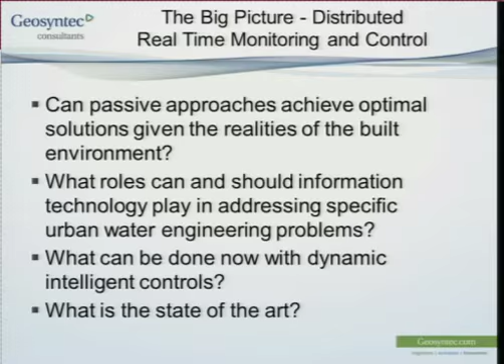You all know the challenges that we have, especially in retrofit situations. Can we fundamentally rebuild our cities, or do we have other ways of fundamentally using the existing infrastructure in new and interesting ways? And then one level down, when you say, okay, maybe we should look at things besides just passive solutions, what roles can technology play in providing an alternative to that? And then understanding, hopefully from this presentation, where we are with the state of the practice and the state of technology.

So I didn't just decide one day that this sounded like a really cool thing to go out and research and work on. It's like most things that look really interesting. They take a long time to develop. The very first opportunity in my career to look at this was a research study funded through CICEET. And the goal of the project was really fundamentally to take information from the internet and get it out to control real things in the cheapest, most efficient way possible. And this was specific to salt marsh restoration.

And that's a whole other presentation on its own. It was a really great project, but we got $250,000 basically to find the lowest cost, most efficient way of taking information and using it out in the environment. And at that time, this project wrapped up around 2007. How many of you had smartphones in 2007? Okay, none of us. How many of you have them now, right? Fundamental change to the way we actually operate with information.

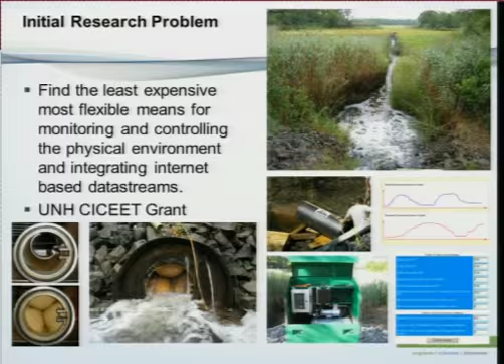This research, right as it was wrapping up, we were able to look at and see that there were fundamental new ways to do what we had done. We had used conventional industrial automation and SCADA equipment to do that work, and we realized things were really changing very quickly. So we learned a whole lot about that, and as a water resources engineer, I saw that there were lots of opportunities to do different things.

So I'm going to mention this term, Scott mentioned OptiRTC. That's kind of our commercial name for what we're doing. But the underlying research is really highly distributed real-time control. And what is it really? It's an ecosystem of smart environmental infrastructure. And the key thing you'll see in the architecture that we have is that it's completely scalable.

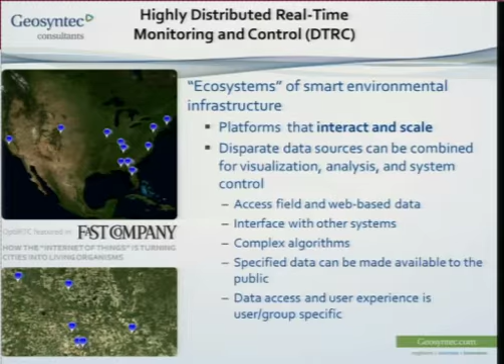So you're not limited by the physical constraints between where sensors are, where actuators are, and the way in which you use them. And you'll see that based on the structure. We also are using a cloud-based platform, which means that we can go from having controls at a rain barrel size to the scale of controlling literally hundreds of thousands or millions of devices in parallel. And the architecture is exactly identical. The resources can be scaled very easily, and that was one of our underlying goals.

So Scott put this diagram up, and I know it's got a lot on it, but the Internet of Things really looks like this. You've got things out in the environment. In this case, for us, we're interested in things like pressure transducers or ultrasonic level sensors, rain gauges, and then, like Scott showed with that great video, things like actuators, components of the infrastructure that we can install and then control. And what we do with an Internet of Things-based approach is right in the field, at the end of these sensor wires, we turn those data streams into Internet-compliant data streams.

So with this physical device out in the field, this is at the North Carolina site that I'll talk about, we turn that data stream into a piece of information that looks like every other piece of information that's flowing around the Internet. The systems then that we use to interact with these, and this is in both directions, are standard enterprise data management systems. These are the same systems if you decided to go out and start an e-commerce company, or you wanted to run a bank, or you wanted to run an accounting system. You use a standard enterprise data management system.

Historically, that's looked like something like SQL Server, where you buy a server, you install some database management software, you write an application to run on it, you run a whole bunch of hardware. But in the last few years, since we started this work and pursued this research, there have been a whole new class of these types of services, and they're all cloud-based. You hear that term a lot, but what does it really mean in this case? We're not just outsourcing hardware and using a server farm somewhere to take the place of our infrastructure. We're outsourcing the entire platform. So this is called Platform as a Service. And we use Microsoft Windows Azure. So like Xbox 360 is built on Microsoft Windows Azure, for example.

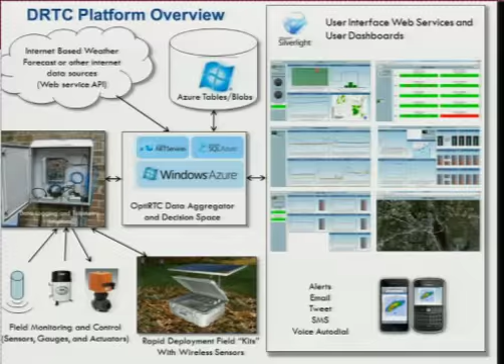So that's by far my longest slide. I'm not going to get into the details of the differences in different cloud platforms or the underlying systems for the Azure application. We basically build a thin application. If you want to have an analogy, Azure is like getting Excel, and OptiRTC or DRTC systems are like building the spreadsheet, right?

So people ask, okay, is it proprietary? And it's like, well, the Microsoft stuff is proprietary, but you've got to sit down and build it. It's like asking, is a spreadsheet proprietary? Okay. Well, if you're the one who wrote the spreadsheet, you have a vested interest, and you obviously put it together. But the underlying approach is not proprietary. It's a standard approach. I'm going to show a whole bunch of examples around the country.

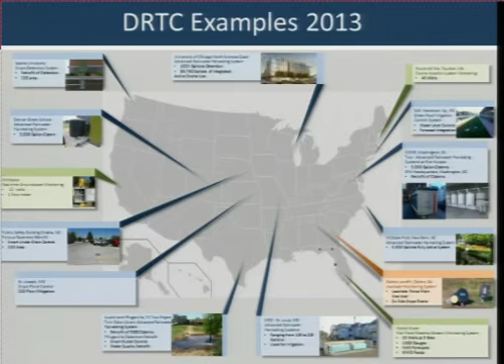I just wanted to point out we're actually using this for things that have nothing to do with water resources, like remediation systems. There's a landfill in Georgia where the entire leachate collection system is run in the exact same way as these water resources systems.

And these are the kind of broad categories of example projects I'm going to talk about relative to water resources. I'm going to get into a bunch of detail on advanced rainwater harvesting, but also predictive retention and detention systems, controlled underdrain bioretention, porous pavement. Scott already talked about that, so I'm going to skip it. And then active green roofs as well.

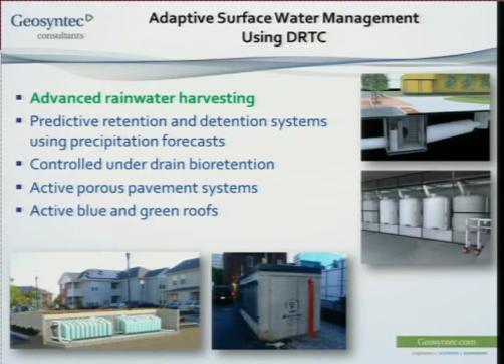So the first one, advanced rainwater harvesting systems. So why is it so advanced? What's the difference between a regular rainwater harvesting system and an advanced rainwater harvesting system? Well, it's actually really simple. There's one valve, and Scott showed an example of that, but there's really just one valve that you're adding.

And then you also need to know the level in the storage tank. You take those two things, those are the only components you need, a valve to be able to drain the system and a level to know what the level in the system is. You take those two components and you connect them to everything I've just described. And you can do amazing things, specifically around forecasts, and I'll show the examples of this.

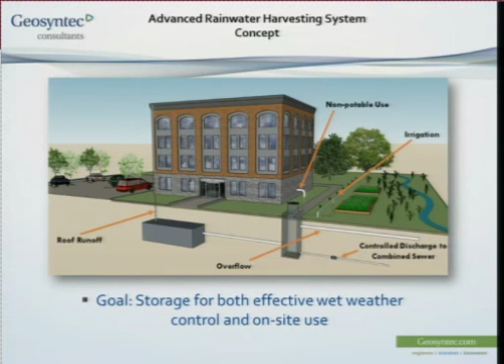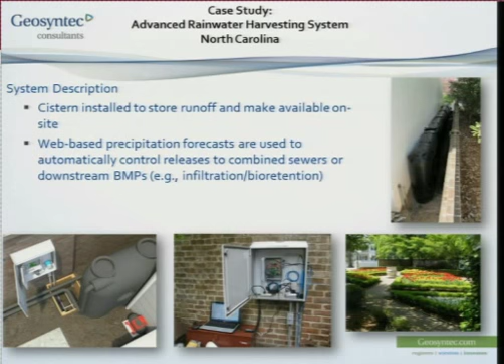So the project I'm going to highlight is our longest running pilot under the WRF research, and it's a collaboration with Bill Hunt and Kathy DeBusk at North Carolina State. They installed 3,300 gallons of retrofit rainwater harvesting at this site in New Bern, North Carolina. And then we did exactly what I've described to it.

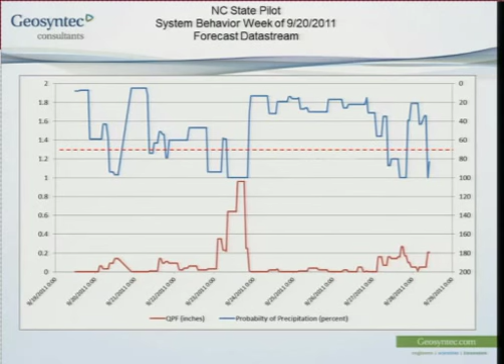And what the system does, at the cloud level, we ingest the quantitative precipitation forecast and the probability of precipitation forecast from NOAA. And this is what it looks like over a week. It actually changes every hour, so that's really complex to show, but this is essentially what it is over a week. So this is predicted rainfall, and then the blue coming down is the probability of those particular components of the forecast occurring.

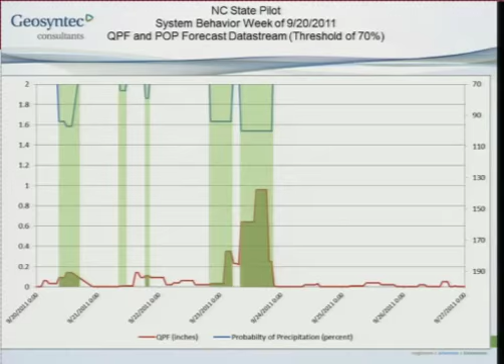So the system watches this every single minute, and NOAA updates it every hour, and it believes certain portions of the forecast. This algorithm is actually very simple. It only believes the components of the forecast that are greater than 70% probable, and we've had it running this way for a very long time. You can come up with whatever algorithm you want. This is what we started with, and I'll show you how effective it was.

At 3 a.m., it saw that the probability of this rainfall occurring, this storm moving over North Carolina in the next 48 hours, was highly probable. It said, I'm full. I'm going to overtop. How much do I need to drain down? The algorithm takes the forecast, the volumetric runoff coefficient, something we call the conservation factor, and it makes a prediction. It's gambling on the weather about how much storage it needs with the intent of getting complete wet weather capture.

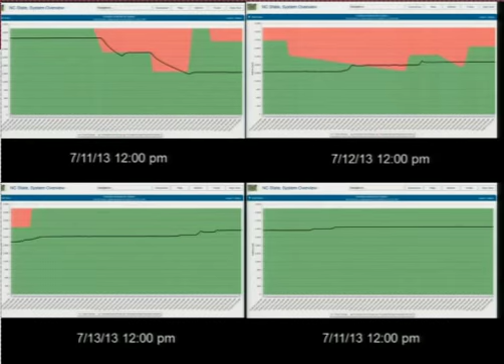And you're going to say, okay, you picked out a storm where you got lucky, and that's the case. We don't get lucky all the time. I mean, the algorithm got exactly right on that one I showed. This is actually from July, and this was a very long storm event. NOAA was all over the place with their forecast, you can see the red line going up and down, right? The system made a bunch of corrections, and we ended up getting complete wet weather capture, but we didn't get all our water back because NOAA basically over-predicted the forecast.

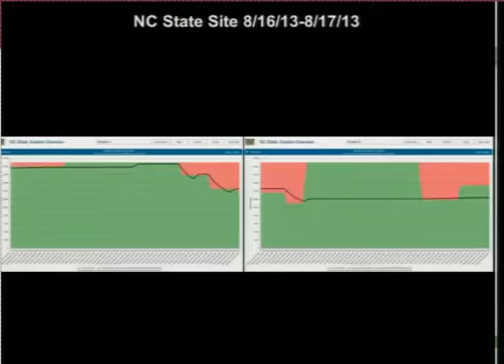This was yesterday, the day before. The tank was nearly full, which is what it's supposed to do. And again, NOAA kept ratcheting the forecast up. They corrected it here. And then actually it didn't rain nearly as much. I just looked at it. It didn't rain nearly as much as we had anticipated. So we get it wrong sometimes, and I just downloaded this over lunch.

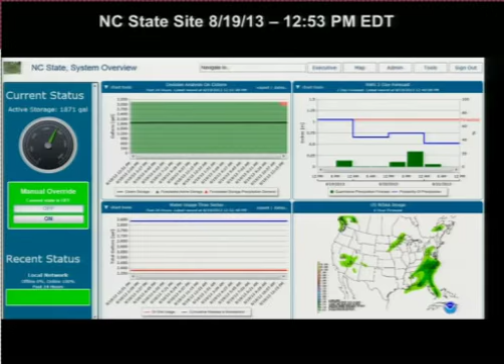So there's a storm coming, and it's not very probable that it's going to rain. So the system is not full because of that last event a couple of days ago. It didn't rain as much as it was supposed to. And this storm is pretty shaky from the forecast perspective. So it's saying, you know what, I'm not going to make any decisions. NOAA doesn't know what's going to happen. I'm just going to wait and see. So we'll see. Something will happen maybe later today. The black line will probably come up a little bit.

And then I wanted to show you what it's like to interact with these systems. Let's see if we can do this. If you're North Carolina State or one of the other entities, this is the North Carolina State site. This is what it's like to go through the web browser and interact with these things. It's very dynamic. There's a mapping interface in addition to this querying strategy. So you have these sites all over the country.

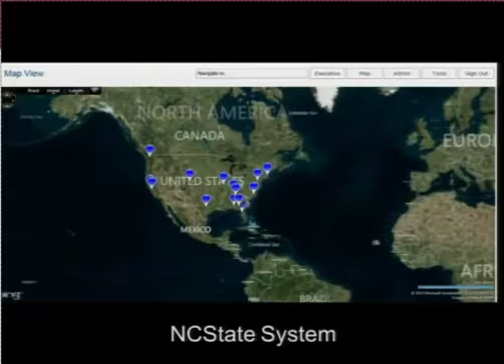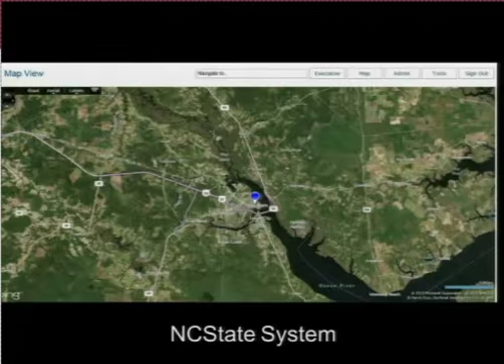And like if you had a city and you had 1,000 rain tanks, or different pieces of infrastructure, you would have them all on it. It's like Google Earth for data, right? You can zoom into this stuff at a really extreme level of detail. So those are links to the dashboards.

Interestingly, the physical reality of the user interface doesn't have to match up with the physical reality of the field. So how you're interacting with data doesn't have to have anything to do with what's actually going on. Like if you had 1,000 sites, you don't have to know where those are or what they are even to interact with them. And then this shows something that we think is super cool.

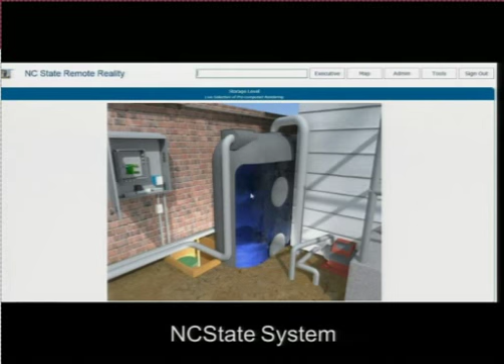It's called remote reality. Basically, when you bring up a remote reality interface, you'll see a bunch of them. You look at the image, it's like you're standing there and you have X-ray vision and you can actually see what the water level is. So what we do is we render every permutation of the possible field conditions, and then we map those to the sensors, and then we display that into the web browser, right?

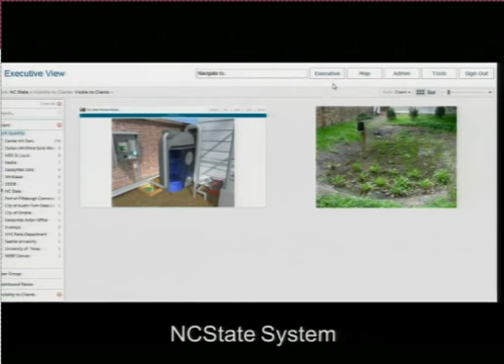So you can be someone who knows nothing about this system. You don't have to know what gauges mean or even be able to read a graph. You can look at that as the public and say, hey, I know what's in the tank. There it is. There's the level. So I'll show some more of those.

And then I said we got lucky on that one event. I showed some where we didn't. The fact is this algorithm works really well. This is the period between August of 2011 and the end of the year, 2012. And we have full data going up to the present, too. I just don't have it on this graph. We had a period where it was offline in the middle here where you see some things.

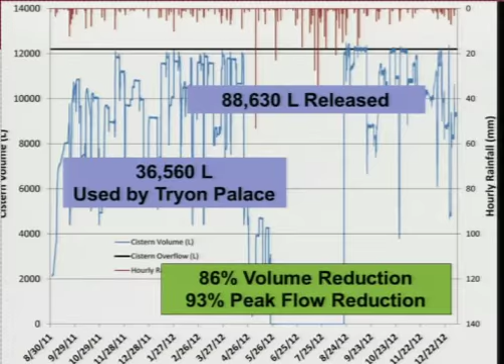Anytime that line comes down, it's when it's made a decision or water has been used on site. Anytime it goes up, it's when it's filling. When it's at the top, it overtops. The bottom line is the system intentionally released 88,630 liters making decisions during this period. They used 36,560 liters in the rainwater harvesting system. And this is the result. We got an 86% reduction in volume and a 93% reduction in peak flow.

And here's the comparison between if we had not had the intelligence on the system and made these decisions to open the valve up, and if we had it on. You'll see these two numbers are the ones I just talked about. But here's the comparison. If you just relied on the unreliable demand of the irrigation, you would have had 21% reduction in wet weather flow volume and 11% reduction in peak flow. 58% overflow frequency for the events compared to 18.

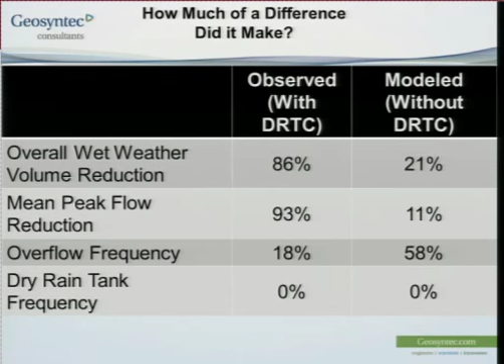And then the algorithm is very conservative about running out of water, and neither system ran out of water. But this is just taking a valve and a sensor and a really smart system and adding it to this significant investment, and huge differences in performance. So there's a lot of talk about extreme events. I think a lot of the questions I've heard at this conference are about extreme events.

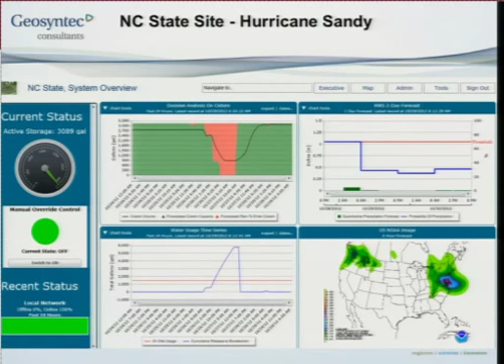Here's the system during Hurricane Sandy. So I was watching CNN, and I think it says 3 a.m. on the 29th, right? Dahlia knows what was happening in New York City at 3 a.m. that night. Not good. What was interesting is back on the 26th, this system saw Hurricane Sandy, or Superstorm Sandy, coming. It drained itself all the way down.

The university doesn't allow us to drain it below 900 gallons. That's to make sure that the gardener never gets no water. It said it should have drained the whole thing, right? But during this entire period, from there all the way up to when it filled up, there was no discharge. And this didn't mitigate all of the effects, because it did overtop, and we could have used a lot more volume. But the point is, this tank was nearly full at the beginning of Sandy.

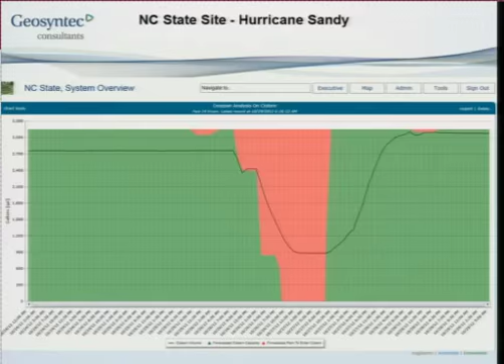This system worked as hard as it could to mitigate the effects. And this shows you the kinds of things we can do with our infrastructure relative to extreme events using information. Now I'm just going to go through a whole bunch of other examples of installations and types of installations. That one was in extreme detail. I'd say put your seatbelt on, because I've got lots of pictures and lots of different types. But it's kind of fun.

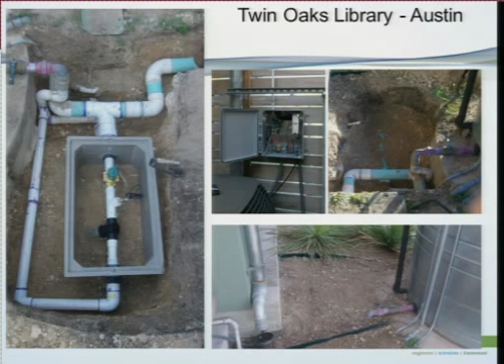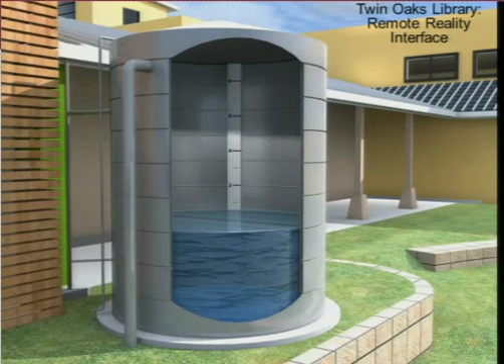The library in Austin, Texas, they had existing rainwater harvesting tanks. We added a valve in, level sensor. Here's the remote reality interface for that. It's better than being there. You can actually tell how much water's in the thing.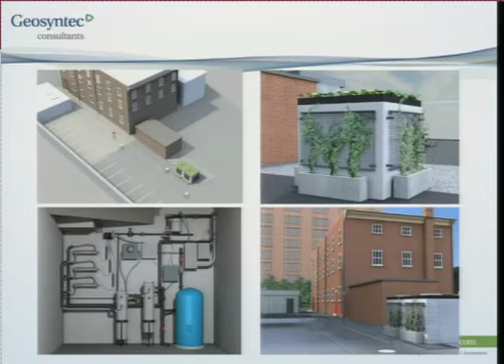In Washington, D.C., I like to say stimulus money didn't go very far. It actually went, there's the Capitol, right over there, to a firehouse where we installed these above-ground tanks you see here on an oblique image. This is what they look like in renderings before we built them.

Here's the remote reality interface. We put a virtual staff gauge in, so if you want to read it, you can. There's a cool video out at our booth where it shows the water going up and down. There's right after they were installed, above-ground tanks. You put green roofs on top of them.

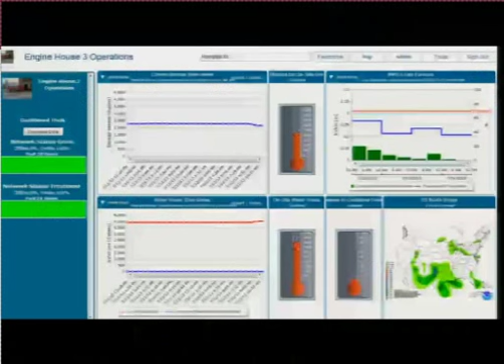I was out there a couple of weeks ago. There's a couple of weeds in it, but they look kind of cool. They didn't plant the green screens yet. There's me looking pretty proud of the water coming out, but it's at a firehouse, so they use water quite a bit, but we can monitor their daily use. It works just like the ones in New Bern.

We did it at another firehouse over in Anacostia. You see, this is the exact same design. The intent was to come up with a modular above-ground tank that could be installed anywhere in the district.

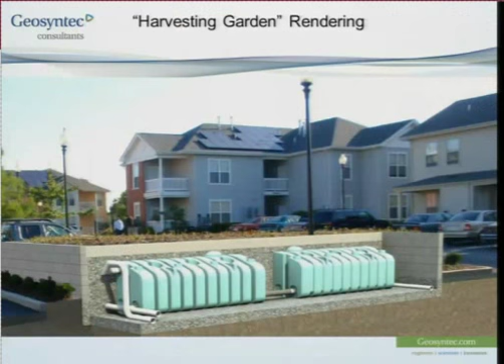In St. Louis, we built 7 projects in public housing areas. We call these harvesting gardens, or I do, because what we did was we took landscaped islands and we retrofit them with, this has 15,000 gallons of storage in a landscaped island. Polyethylene tanks, not above ground, not below ground. That's a really interesting story, but nonetheless, an interesting outcome as well.

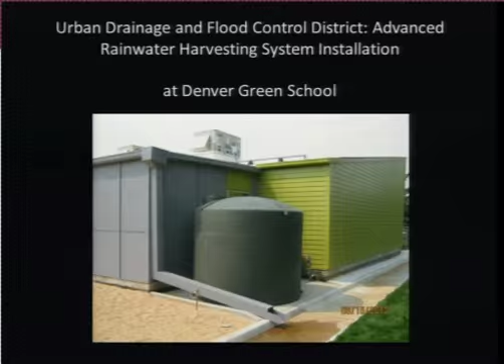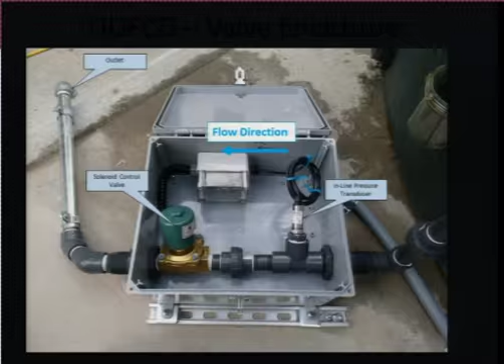School in Denver. Let's give some of the details of what some of the components look like. This one is wireless. There's a valve and the sensor. Those are like the key components. In Chattanooga, we installed a much larger system, an 8-inch valve. Operates the same way that Scott described, but this is for an underground harvesting system.

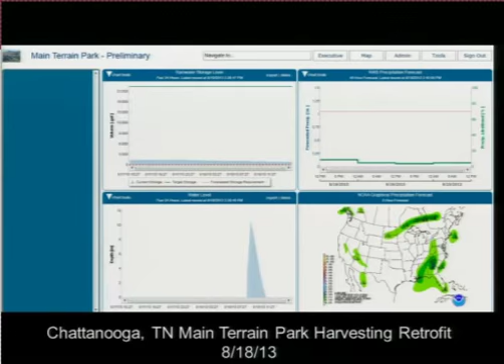One thing I'll say that I don't think anyone's really talked about at this conference, but is really interesting. Pipes leak like sieves. Most of our modeling, we don't assume this occurs. This system actually doesn't hold water. And that wasn't our design, but it's really interesting because they did all these green retrofits, and they found out that their rainwater harvesting system doesn't hold water because it all infiltrates in the pipe. So that's still an issue waiting to be resolved.

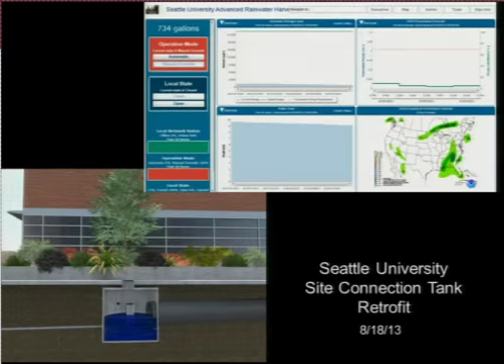Similar system, this is a peak flow tank, no harvesting, just smart detention at Seattle University. We just started on the contract to retrofit EPA headquarters. They have 6,000 gallons in the basement, and this is the rendering for their remote reality interface. This one's kind of cool because every tank has a different level, so it's a more complicated one. But we're retrofitting this. It should be done by the first of the year.

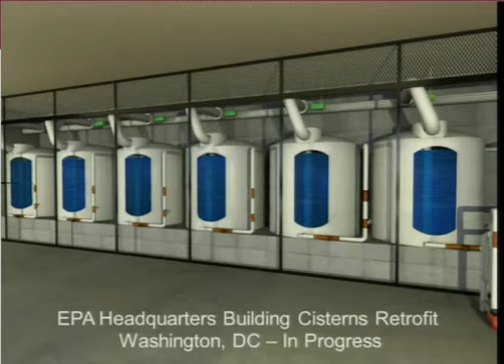And they only use it for irrigation there, so there's basically 9 months of the year where the investment does nothing right now. So we're really excited to have this thing work all year long, especially at EPA headquarters. One of the really big opportunities, you can do this exact same thing, not just with rainwater harvesting systems. How many flood control, detention, and retention basins do we have in the United States? And how much is it to retrofit them to improve water quality?

Okay, this is a pond, a dry pond in Pflugerville, Texas. Completely off grid. It's all solar, all cellular. It's connected up to everything we just talked about. We basically turned the outlet design of this system into a software problem. You want it to be a dry pond, a wet pond, an extended detention wet pond. You want to change the permanent pool volume.

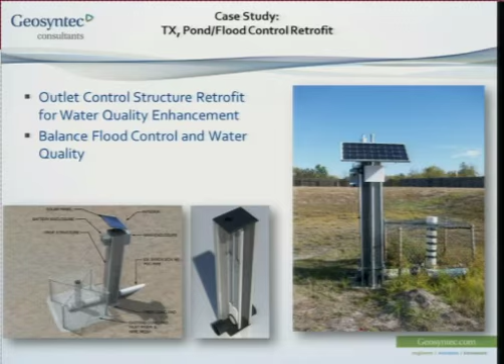All of those things are just settings in the software. So when you do this, here's an actual event that Mike Barrett operated. And you get really cool things. I mean, one thing that Scott didn't talk about, but embedded in this minute-by-minute data is an amazing amount of information about how these systems work.

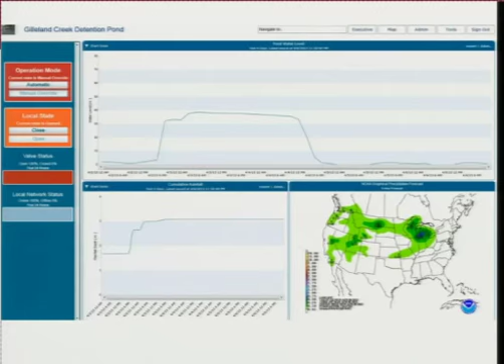The slope of that line while the valve is closed, that's where it's going up, tells you exactly what the infiltration rate is through the bottom of this detention pond. We don't have that kind of data. As we start to instrument these systems, the monitoring data comes along because you have to monitor them in order to control them. So here's an example.

This is a model of a year using SWMM, taking an extended detention pond, extended detention wetland, and all we did was actuate the orifice based on forecast information. And the bottom line is we're able to nearly double the residence time just by, instead of using the volume for these really short periods of time right after rainfall, using the entire volume and then draining it down before the rainfall, completely turning the hydraulics on its head.

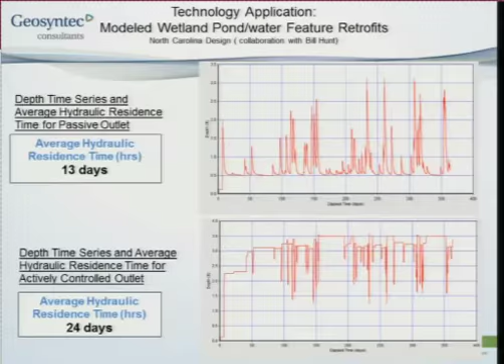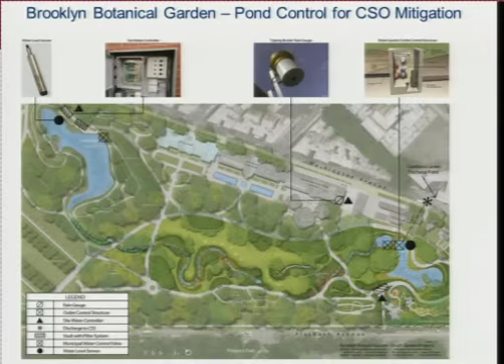We're doing this at the Brooklyn Botanical Gardens. They're doing a $19 million upgrade of the gardens. We've taken their water features, and we're going to operate in this same way. When there's a high probability of rainfall, the water features drain themselves down, intending to get complete wet weather capture in a combined sewer area.

Same thing with bioretention, just like Scott described for porous pavement. Retrofitting the underdrains of a bioretention cell, there's a big debate about, you might have heard Andy Reese's talk, which I didn't get to hear, but should we do retain on site? Should we do flow through? Should we have sumps in our bioretention cells? I mean, how much hand-wringing is there, right? You've probably heard this 10 times today.

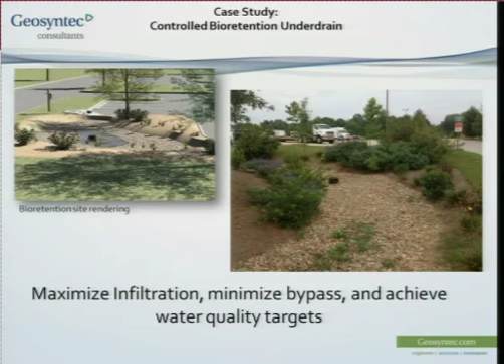This, to us, is a software problem, right? You can change that on an event-by-event basis. You want a 12-inch sump? We'll give you a 12-inch sump. You want it to change from 12 to 24, depending on the size of the event? That's just a software and algorithm issue. You want it to be flow-through for large events and then close during the peak period when there's a combined sewer issue? It's all doable. All you got to do is just decide when you're going to open and close the underdrain.

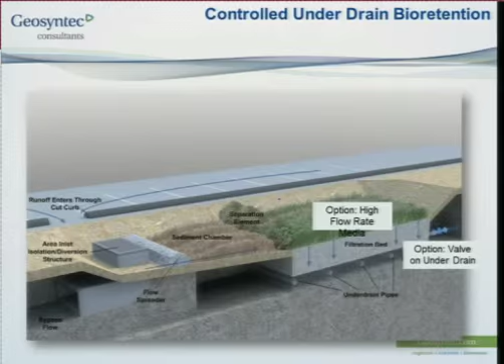And that's kind of the concept of what they look like. The first one has been installed in Gwinnett County, Georgia, and it was actually just installed last week. And the last one I'll bring up, this one is a completely different application, but it's all the same hardware. We've got an ultrasonic level sensor and a little wet well.

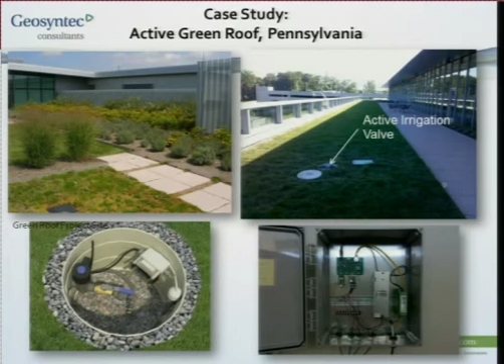This is a beautiful turf grass flood irrigated green roof at SAP headquarters outside Philadelphia. And there's two components. There's a level sensor and a solenoid that opens water to irrigate the grass. Really simple. Actually, this replaced a $2,000 mechanical float valve, which I think was asked earlier. And this is what it does. So this is from July.

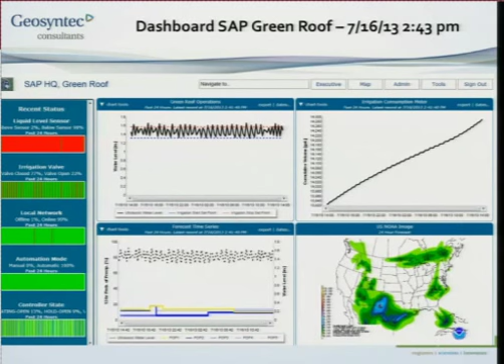During the day, every time this little line goes up here, it's basically irrigating. It's keeping the flood irrigated level between 1.37 inches and 1.57 inches. And we watch in extreme detail. We probably have the best ET data set on a turfgrass green roof anywhere, because we know minute by minute exactly how much water is being taken up.

And then, once you do this, the really cool thing is, okay, so we replaced a float switch. We also can just make the decision based on the forecast to not irrigate. So we can depress the flood irrigation layer, gamble on the weather. The cool thing here is if you get it wrong, you just fill it back up, right? So you save water, and you get stormwater benefits by just taking a dumb mechanical system and basically changing it to an electrical mechanical system, and then most importantly, connecting that up to this infrastructure. It fundamentally changes how you can operate these things.

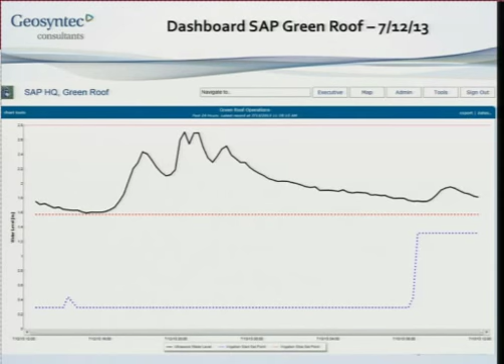And I think I did, so this was a storm event from July. Yeah, this was yesterday. So the 18th, you can see the storms moving up. Actually, again, remember I showed from North Carolina, it wasn't very probable that rainfall that was moving up the coast was going to occur. So same thing was seen in Philadelphia. This blue line up here would have come down, which is the goal if the rainfall had been highly probable in Philadelphia.

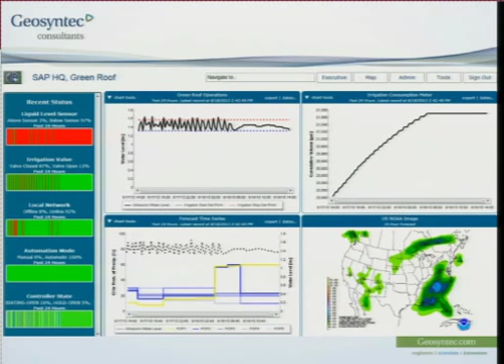It actually did. The reason it didn't keep jogging up and down is because it started to drizzle, right? So it was kind of improbable, and it started to drizzle. So the system said, I'm not going to deplete the flood irrigated layer because I'm not really sure about this. But it did rain a little bit, and it stopped watering, but we didn't really get a big stormwater benefit.

The point is, you can use this exact same information to do everything else we've talked about before. And it's just up to us to come up with the algorithms to control these systems in ways that are beneficial to the environment. And then closing thought. As you can see, for me, it's really hard to overstate the importance of the integration of information into our existing infrastructure and into new design and construction. We're at the bleeding edge on this stuff in research. There are 1,000 dissertations to be written on this, and I anticipate they will be.

One thing that I see in getting really close to managing data in this way is that the biggest fundamental change will be in our ability to actually monitor things, right? So this is about sensor technologies, and the advances in sensor technologies are progressing very, very quickly. And there's a whole bunch of reasons for that I don't have time to get into.